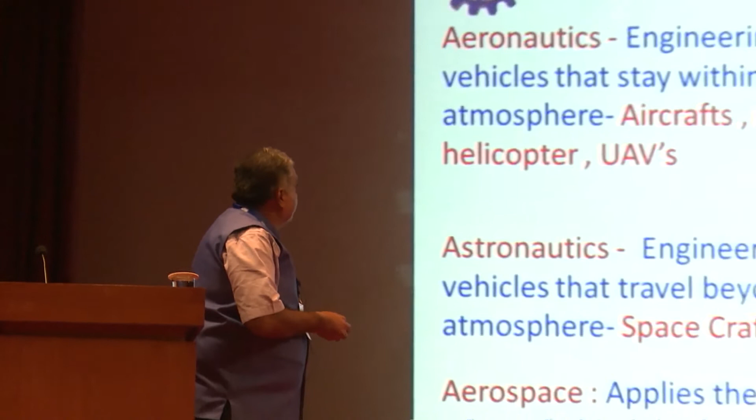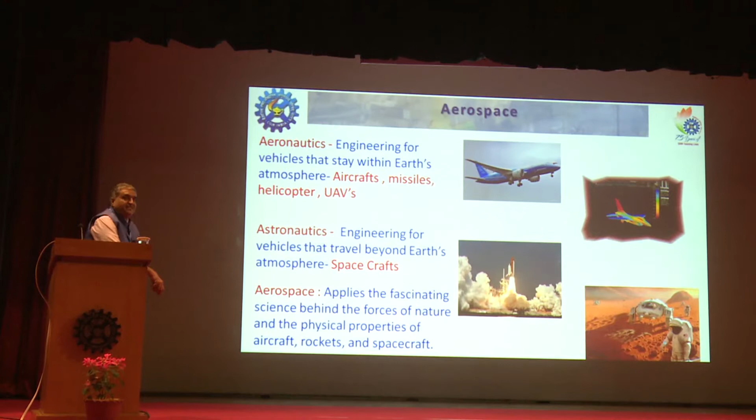As per me, the definition of aerospace is like a combination of aeronautics and astronautics. Aeronautics is what is flown below the Earth's atmosphere, and astronautics are the vehicles flown beyond the Earth's atmosphere. Aerospace is the fascinating science behind the forces of nature and physical properties of spacecraft, rockets, and such.

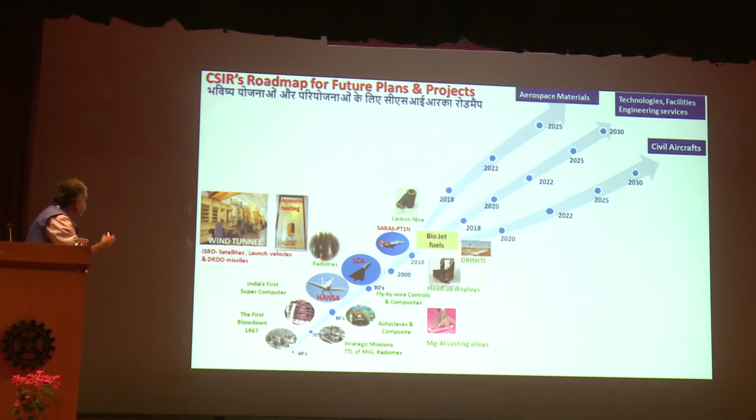CSIR started aerospace in the 60s, and a lot of technologies and facilities have developed. However the major thing happened in the 90s and before, where light combat aircraft technologies were developed by CSIR. Then we developed the SARAS aircraft, a 14-seater, and recently the Drishti and biojet fuels, along with two important facilities which are being used by DRDO and ISRO, developed till 2015.

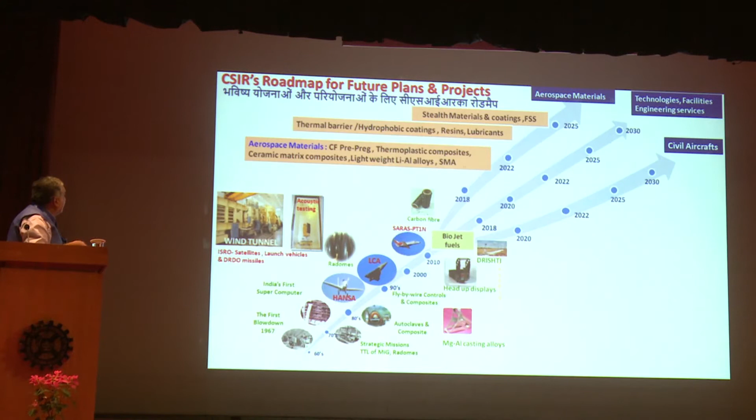Now we have three clear-cut roadmaps: aerospace materials, technologies, and civil aircrafts. In materials, we are planning to take up lightweight alloys, shape memory alloys, thermoplastic composites, coatings, resins, lubricants, and stealth materials. This will be the vision till 2025.

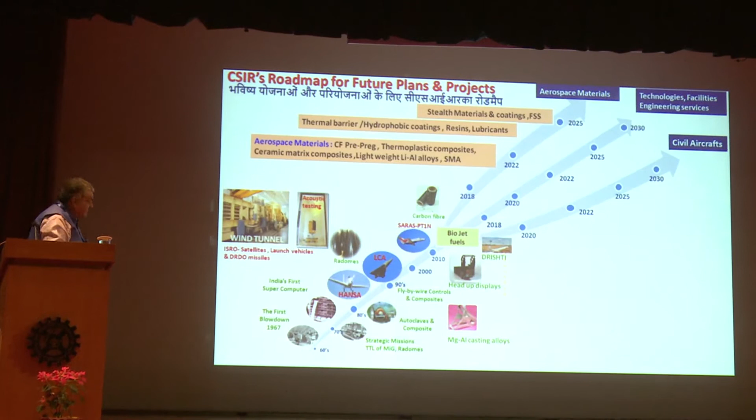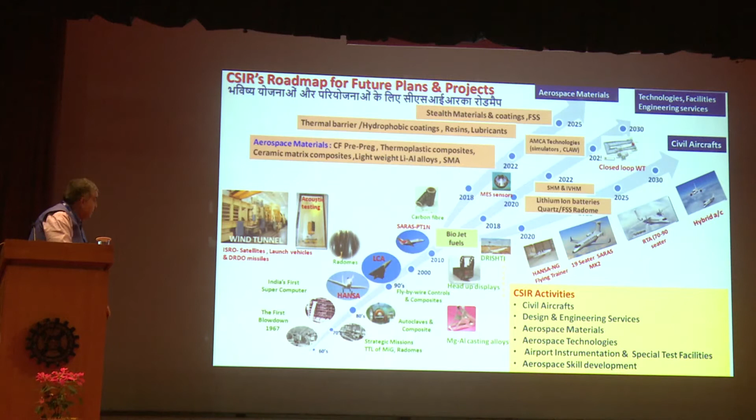In aircrafts, we will be taking up 2-seater, 19-seater, 70-seater, and electric propulsion aircraft till 2030. And in technologies, we will be taking up sensors, batteries, radomes, structural health monitoring, AMCA, and all these technologies. So this is the vision, and these are the activities we will be concentrating on, including skill development.

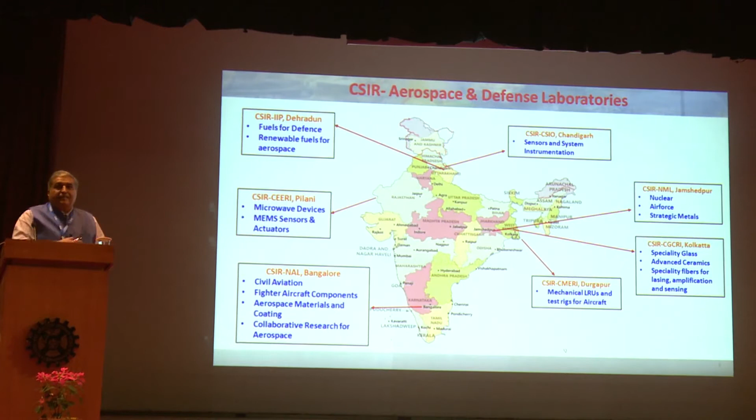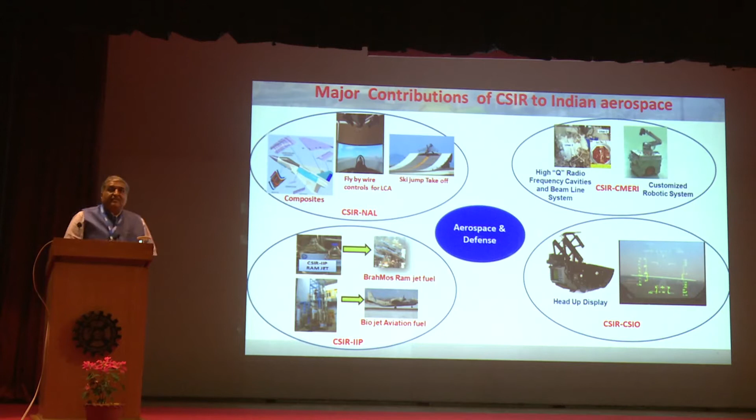These are the participating labs which CSIR has brought together on the theme of aerospace engineering, about 7 participating labs involved in this whole vision of the Director General of CSIR. So I will take you through the contributions CSIR has made.

For the Tejas LCA, complete composites, fly-by-wire, and ski jump technology were developed by NAL. For customized robotic systems and beamline systems, a lot of contribution has been done by CSIR-CMERI. CSIR-IIP has done BrahMos ramjet fuel and recently biojet aviation fuel.

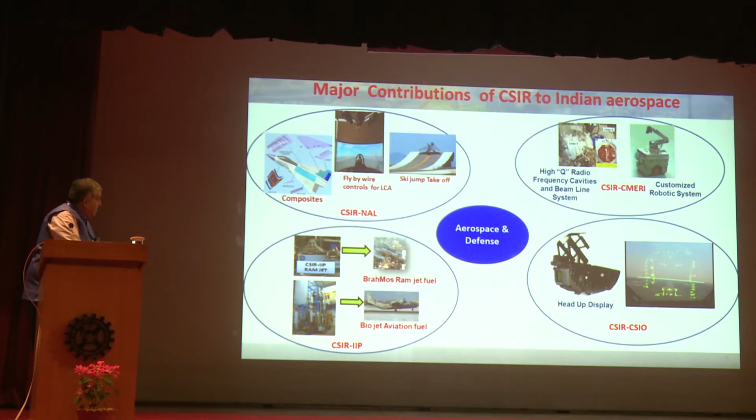CSIR has developed head-up displays and synthetic visions. Also CSIR has developed space traveling wave tubes, acoustic sensors, CGCRI glass beads, and a lot of aerospace materials like composites, magnesium, aluminum alloys, carbon fiber, shape memory alloys, and some Wankel engines and autoclaves developed over the last 2 decades.

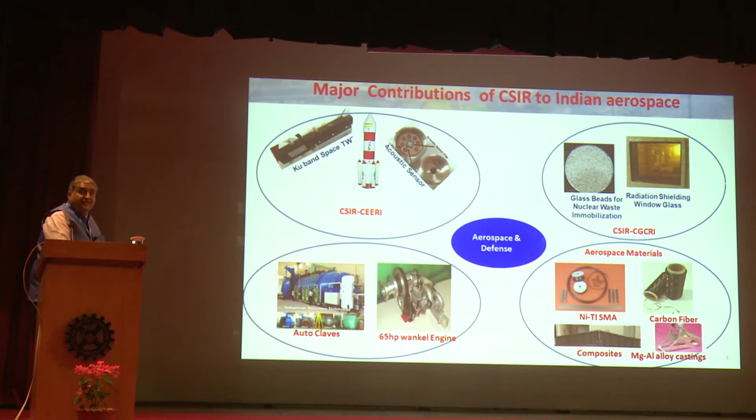The important facilities include wind tunnel facilities, one of the most prestigious, where all missiles, civil and fighter aircrafts, and ISRO projects get tested, which is one of the best, and the acoustic testing facility for satellites and GSLV.

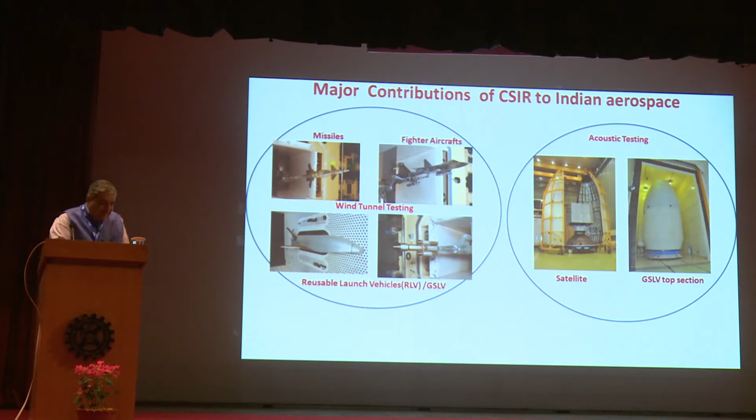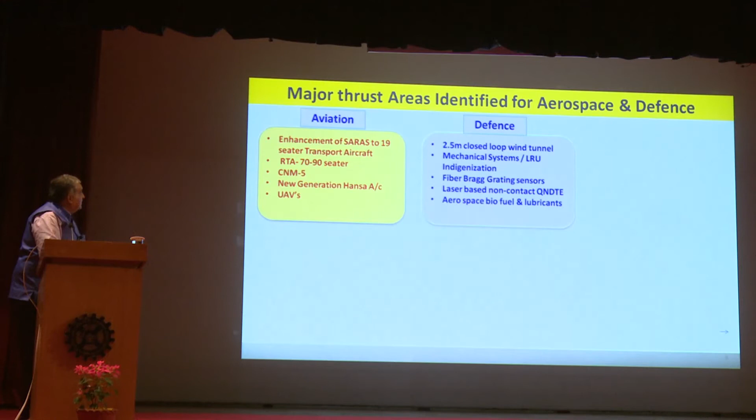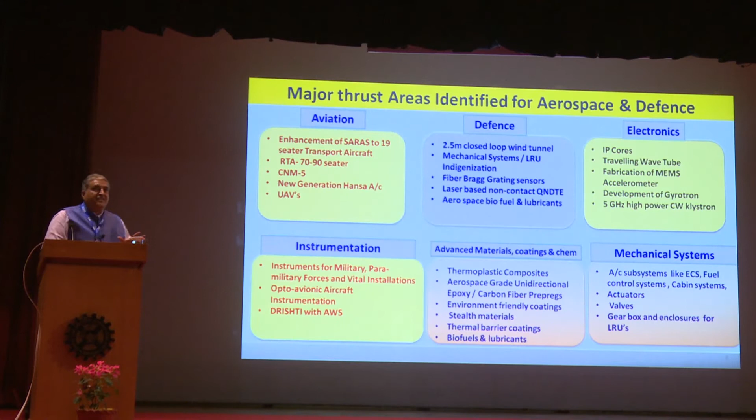A lot of contribution has been done over the last 2 to 3 decades, and the socio-economic impact is unmeasurable. The major thrust areas for aerospace are aviation, facilities, aerospace electronics, instrumentation, materials, coatings, and mechanical systems. This is what we would like to drive the CSIR vision towards aerospace.

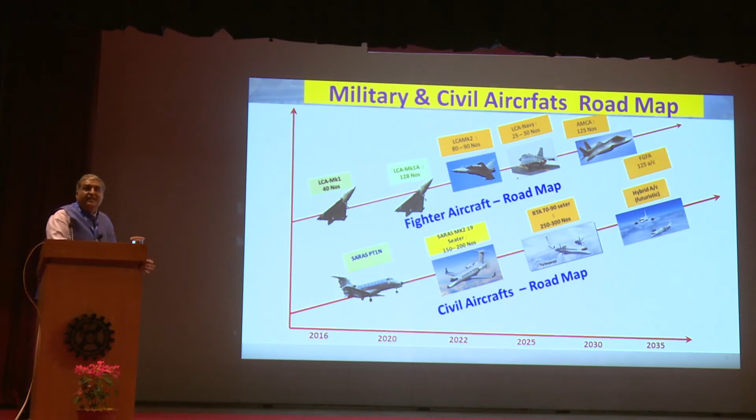This is the roadmap of civil aircrafts, where today we have the SARAS PT-1N, and by 2022 this PT-1N will be converted to Mark II, which is a 19-seater, and then by 2030 we will be developing a 70 to 90 seater, and then slowly move to the hybrid aircraft, which is electrical or electro.

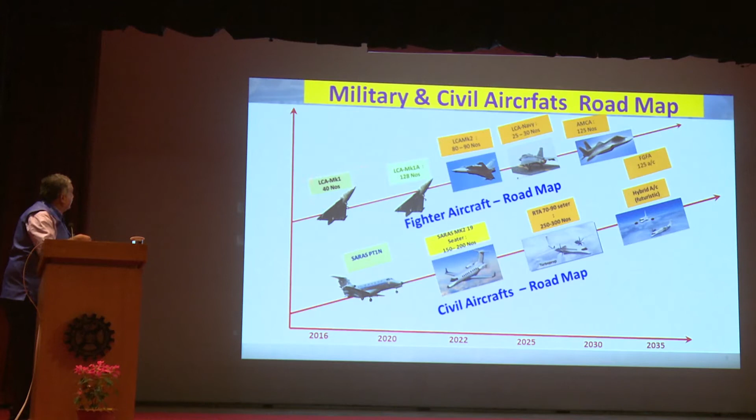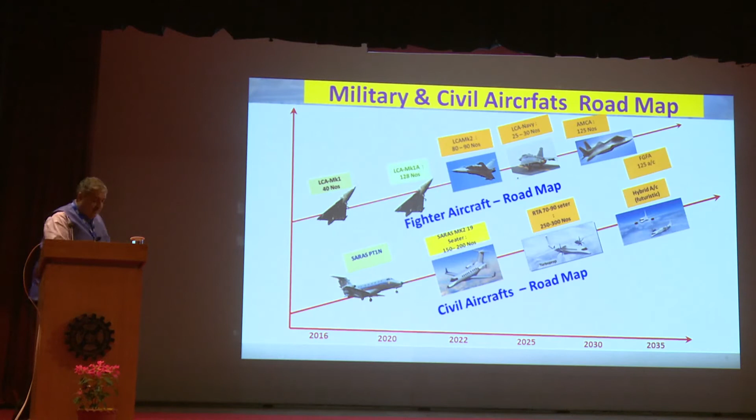Similarly, there is a clear-cut fighter aircraft roadmap. We have LCA Mark 1, Mark 1A, Mark 2, Navy variant, and then by 2035 there will be an advanced medium combat aircraft. This is the ministry's and the country's vision and roadmap, which has come from many documents.

I will just run through the fighter aircraft history. The fighter aircraft HF-24 was developed by HAL in 1967, and there was no development for almost 35 years in the country. This is where aerospace lagged much behind.

Then in 2001 the LCA, which is the 4th generation fighter, came with 3 variants, and now by 2025 it is becoming the advanced medium combat aircraft, with all stealth, sensor fusion, and all these things coming to it.

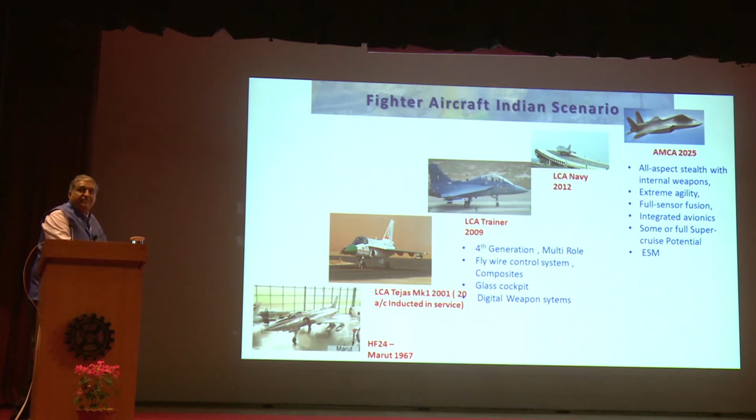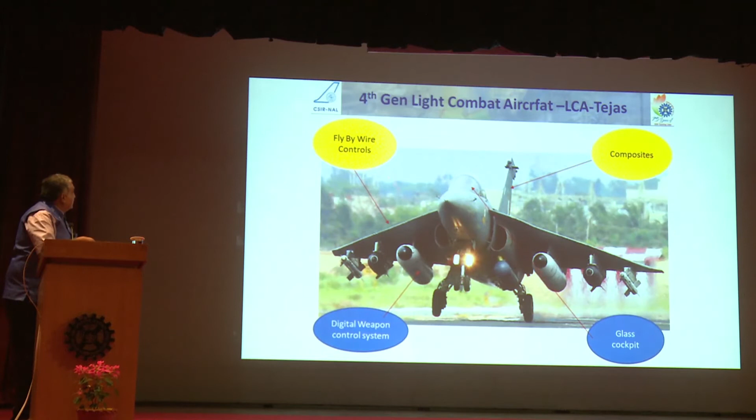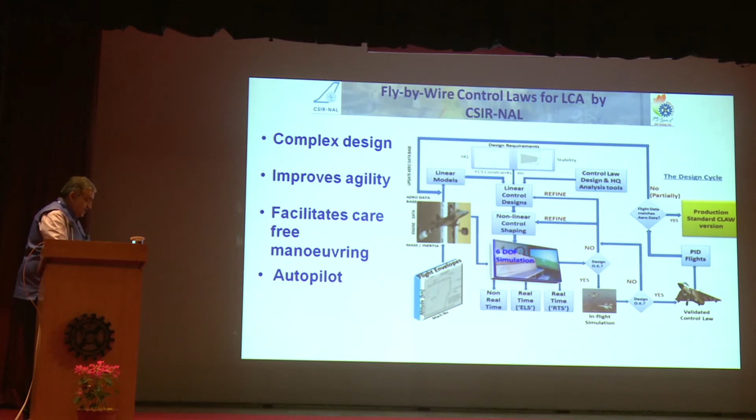These are the technologies developed by CSIR. LCA is called a 4th generation aircraft with features like fly-by-wire control, composites, and glass cockpit. Two of these 4th generation technologies were developed at CSIR: the complex fly-by-wire control system, which greatly improves agility, maneuvering, and autopilot. We will show a video of it.

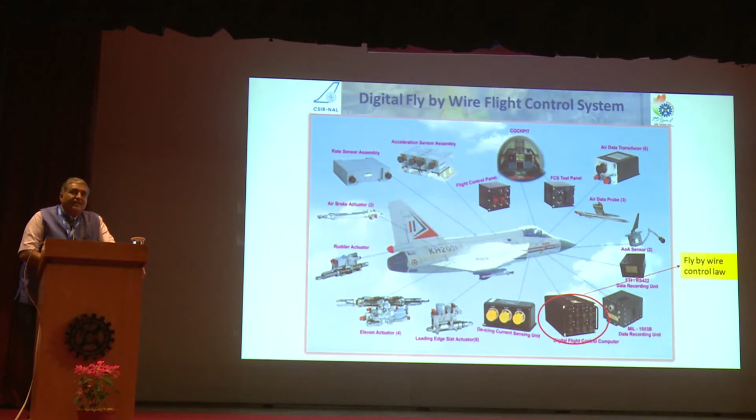This is the complex flight control architecture, where in the computer the fly-by-wire controller, developed at CSIR, resides. There was a technology challenge for this particular controller development, and it was jointly taken up by CSIR and DRDO to make it happen after 1998.

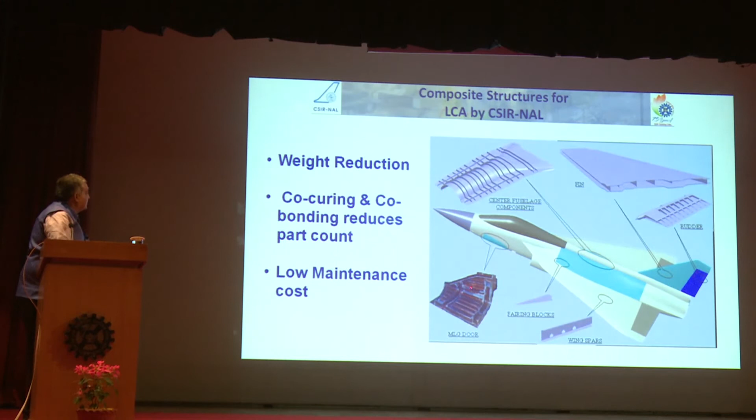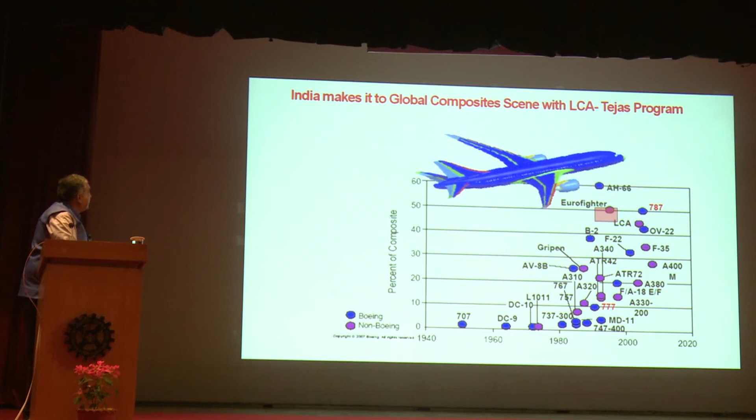There are composites developed for LCA, very complex composites used for weight reduction. If you see the total gamut of composites used in civil and fighter aircraft, LCA stands at the top, with almost 50% of the aircraft made of composites. This has come from CSIR.

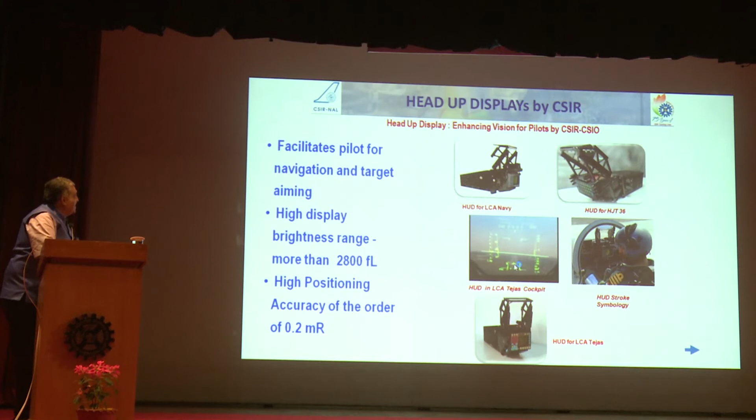The head-up display, which was a very tough technology at that time, has also been developed by CSIR. With permission, sir, I will run one 20-second video so that people will get an appreciation of what this control is.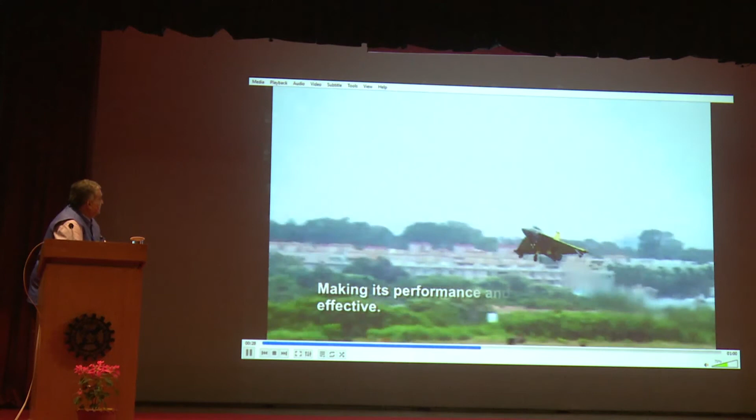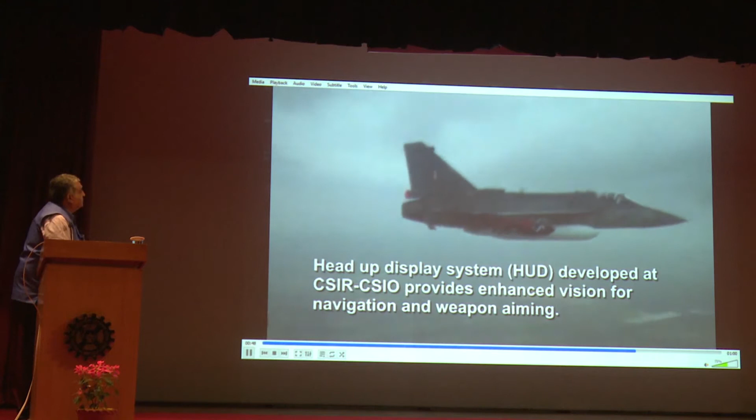CSIR flying high with Tejas, the first indigenous light combat aircraft, recently inducted into the Indian Air Force. Tejas, the world's smallest lightweight fighter aircraft, thanks to the use of CSIR-developed advanced composites that constitute 45% by weight and 90% by area. CSIR-NAL and CSIR-CSIO developed vital technologies and subsystems for Tejas, making its performance and operation cost-effective. CSIR's world-class flight control systems provide improved agility and maneuverability. CSIR's wind tunnel facility helped in finalizing the aerodynamic design and configuration of Tejas. The head-up display system, HUD, developed at CSIR-CSIO, provides enhanced vision for navigation and weapon aiming. A big boost for the Make in India mission of the Government of India. CSIR, the pride of Indian science.

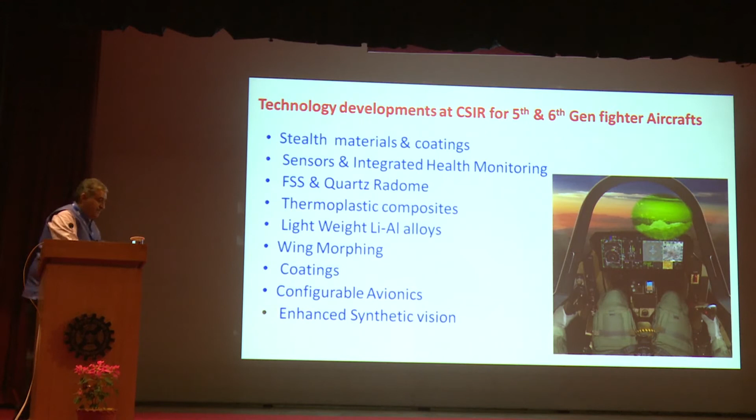For the next 5th and 6th generation of fighter aircraft, CSIR is working on stealth materials, sensors and integrated health monitoring like structural health monitoring or any other avionics sensor, quartz radome and FSS radome, composites, lightweight lithium aluminum alloy, wing morphing, coatings, configurable avionics. This is new technology coming in next generation fighter aircraft, where avionics need not be duplicated across the aircraft. It can be configured at one place, and based on the course of the aircraft, more hardware and software resources can be taken, and other resources can be managed. This is called enhanced synthetic vision.

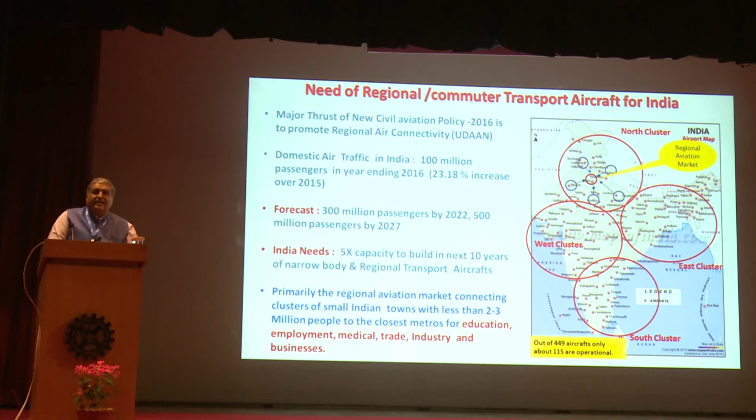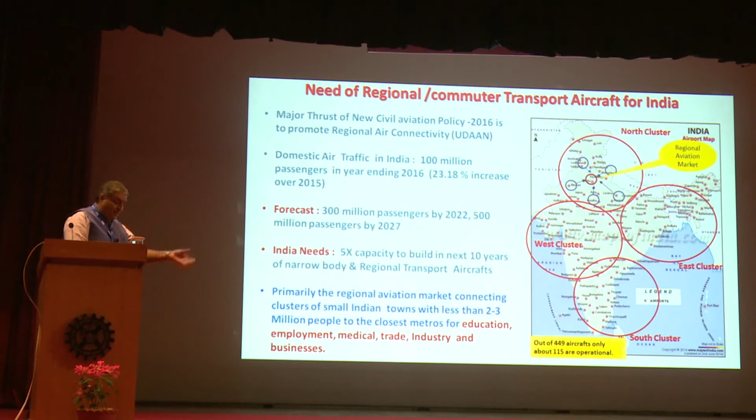Coming to civil aircraft, if you see the country's geographical layout, we have 4 clusters with very close cities. Like Delhi-Lucknow, Delhi-Amritsar, and all, within 300 to 500 kilometers. There is no aircraft which can make effective connectivity for employment, medical, trade, rural development and all. So this was studied, and thanks to the UDAAN scheme where government has promoted about 128 routes for regional connectivity.

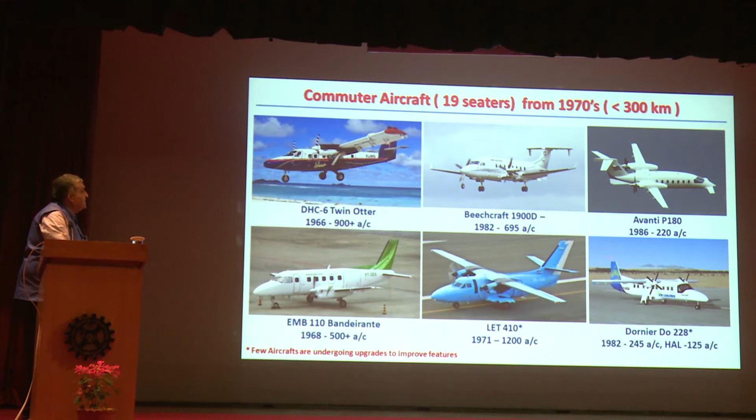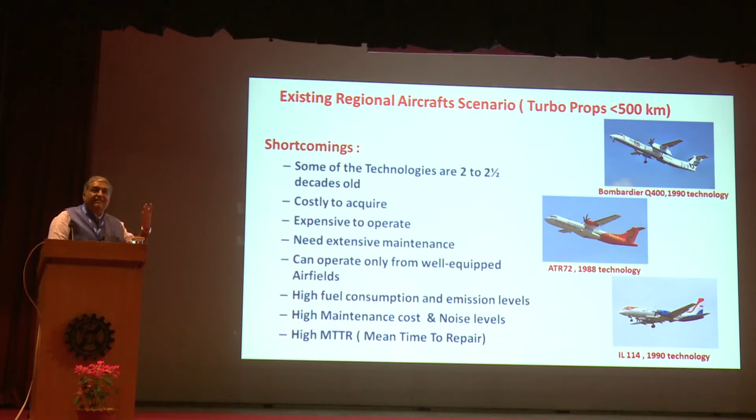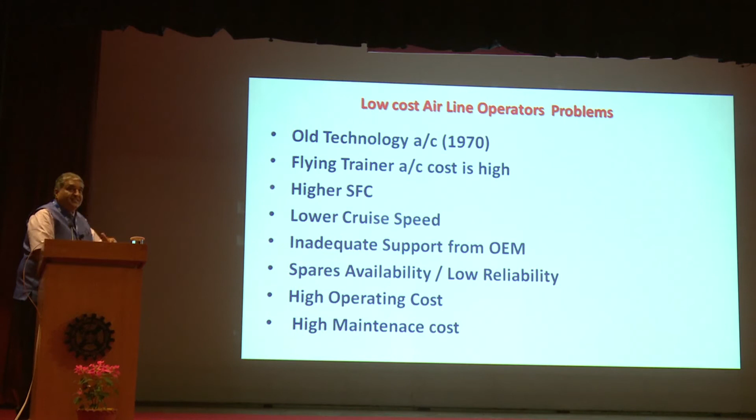Today we have commuter aircraft of 1970s or 1980s technology, and turboprop aircraft like ATR, Bombardier and IL, also about 1990s technology. CSIR has studied the airline operators' requirements. They have very old aircraft, very costly flying trainer aircraft, higher specific fuel consumption, low cruise speed, and spare parts availability is an enormously costly affair. That's why air connectivity is not improving in the country. Though we have 449 airports, we are operating just 115.

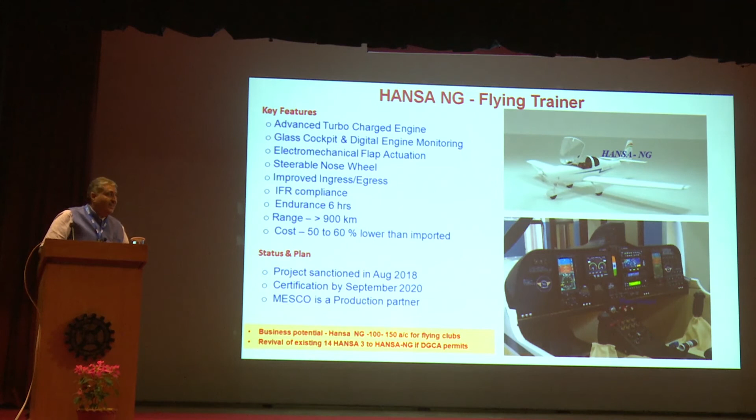So we studied the flying training requirement, and we will be positioning Hansa NG, which has a full glass cockpit, at 50 to 60% lower cost for flying training. This will be given to all flying clubs to train pilots, because passenger traffic is increasing almost threefold and pilot training aircraft are very costly. This is the first aircraft which will come out of production in 2020, and MESCO is the partner for this.

Second is SARAS, a 19-seater aircraft for less than 300 kilometer distance. This is also a sanctioned project. It will have 19 seats and a lot of technologies not found in recent aircraft. I can show the comparison here. This will be certified by 2024 and production from 2025.

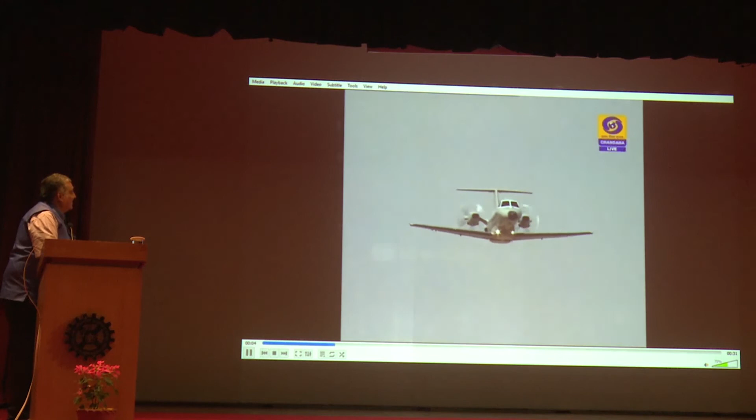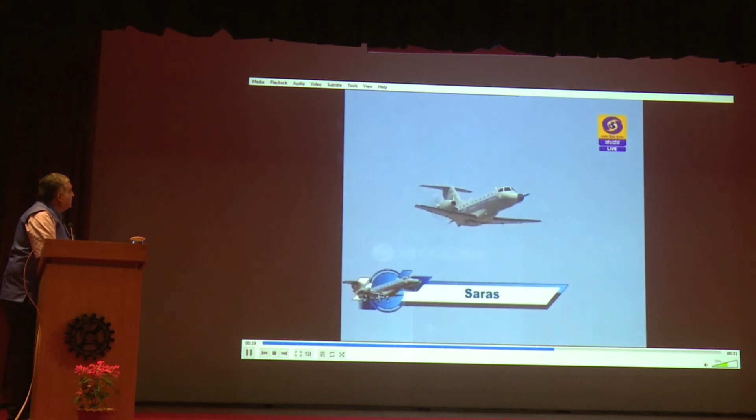After the scintillating takeoff by the SARAS, now you can see the first indigenous multi-role light transport aircraft SARAS, designed by National Aerospace Laboratories. The modified prototype of SARAS PT-1, designated PT-1N, flying in front of you, is piloted by Wing Commander Uday Pratap Singh and Wing Commander Prabhakar.

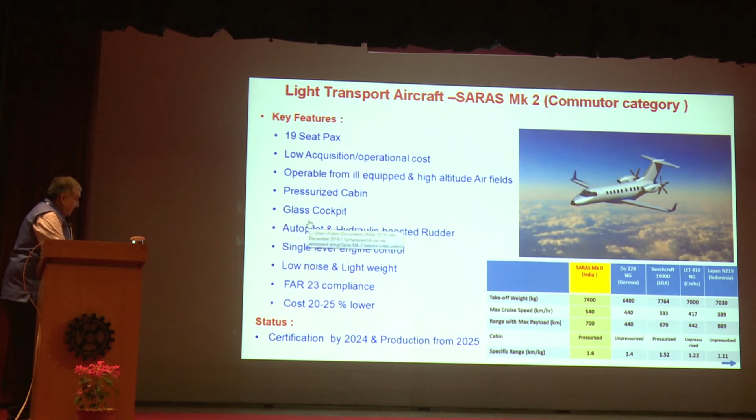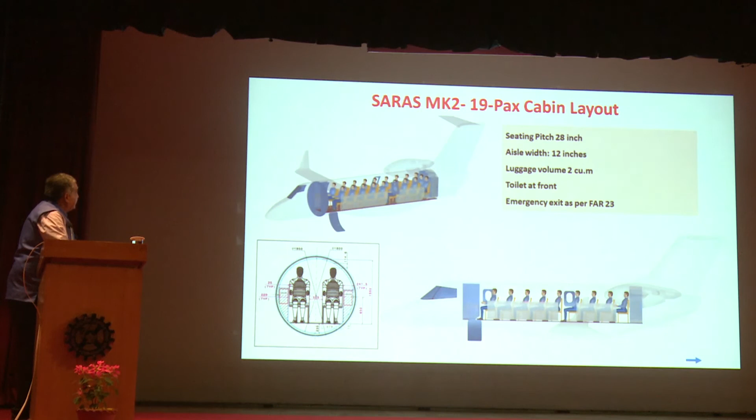We will be putting a lot of composites and procured technologies in this, and propulsion is also high. This will have a layout with 19 seats and a toilet and all these things, compliant to FAR 23. So training requirement has been taken care of, and commuter connectivity requirement has been taken care of.

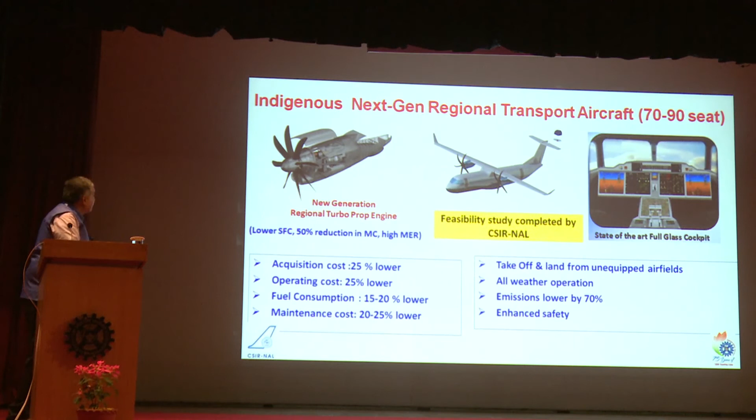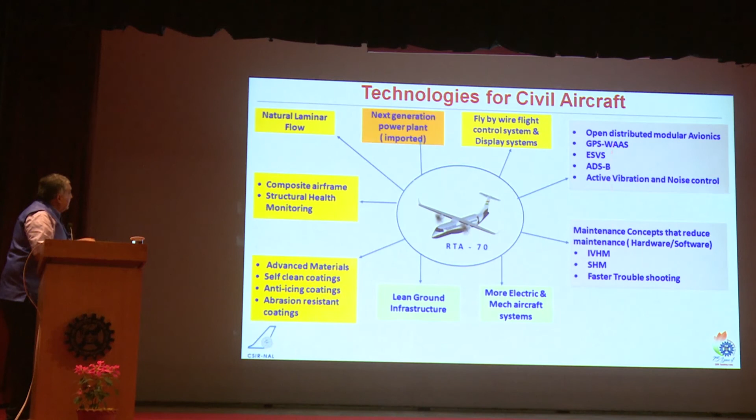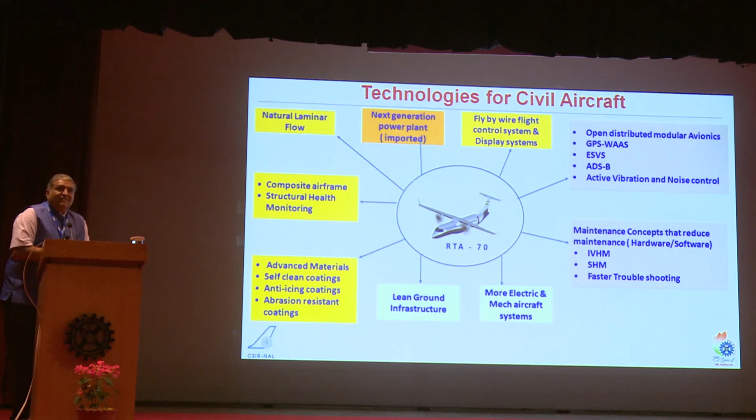Now we are working on a 300 to 500 kilometer, 70 to 90 seater aircraft. This proposal has been given to government. It will have a new generation turboprop engine and state-of-the-art glass cockpit, and reduction in acquisition and operation cost. Important technologies include laminar flow wing, fly-by-wire flight control, avionics with cheaper maintenance, more electric systems, and all these technologies. If everything goes well - yesterday our DGCSIR made a statement in the press - within 6 to 7 years we will make this aircraft certified.

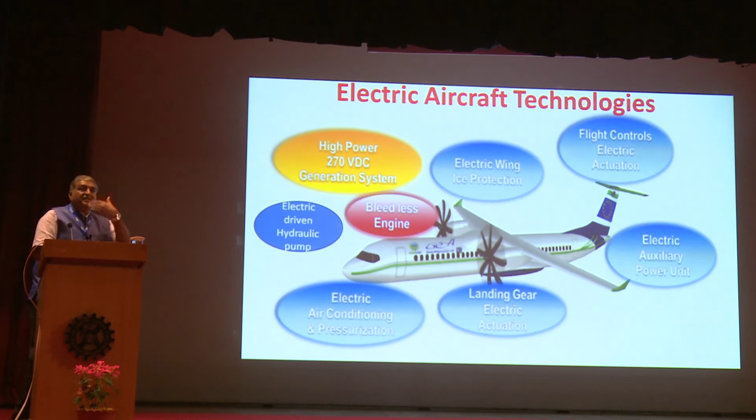We should not forget about electric propulsion. These are the technologies for electric propulsion, which is the future of civil aerospace. There are a lot of advantages like lower emissions, lower noise, improved efficiency, and there are about 4 such things: all electric, turbo electric, parallel hybrid and series hybrid. I did not have to go through it because these technologies are well understood.

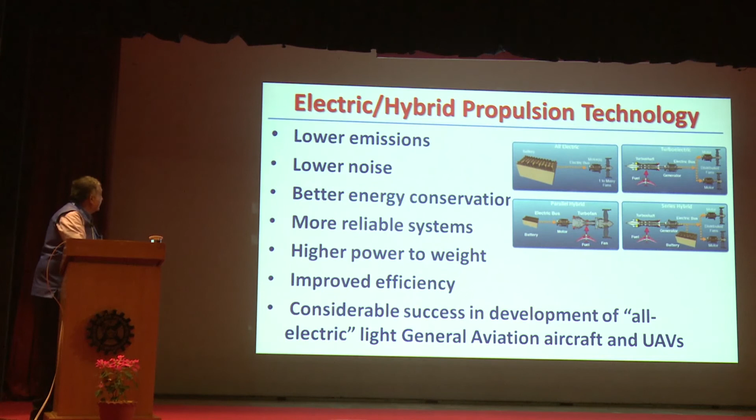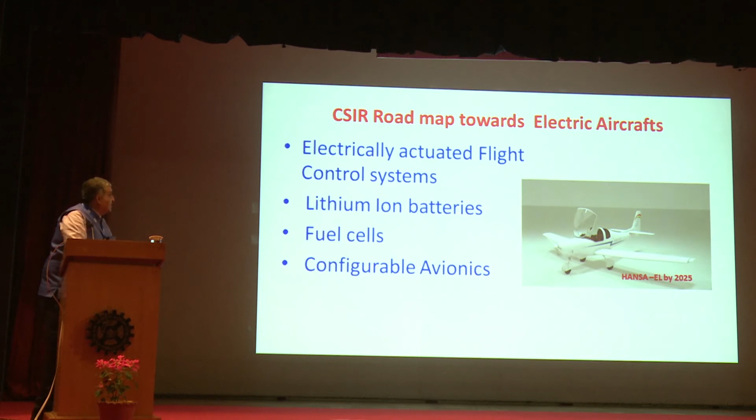CSIR has started work on flight control actuators, lithium-ion batteries, fuel cells and configurable avionics. We will be putting our Hansa as an electric vehicle by 2025. That is our vision, and we have a lot of aerospace test facilities which need to be upgraded.

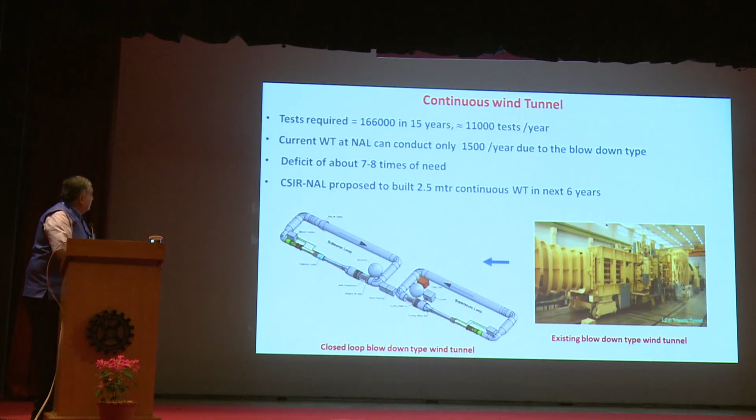Today the wind tunnel gives about 1,500 blowdowns per year, which is not sufficient because the requirement is about 11,000 blowdowns. So we will shortly move to a closed loop type of wind tunnel. Today pressure gets accumulated and the blowdown happens, but in the closed loop system there is no accumulation of pressure - the compressor itself sucks the air.

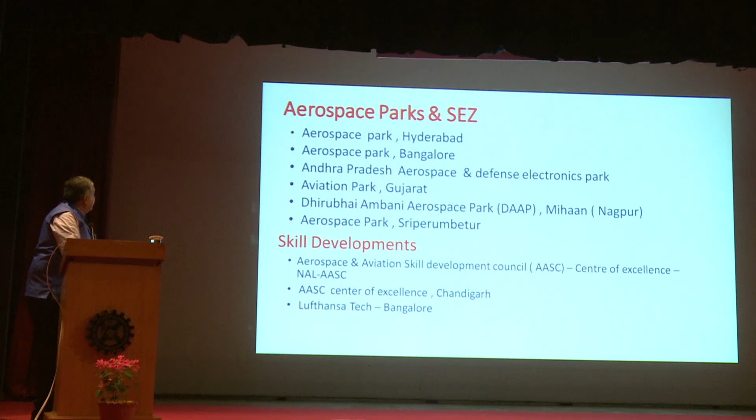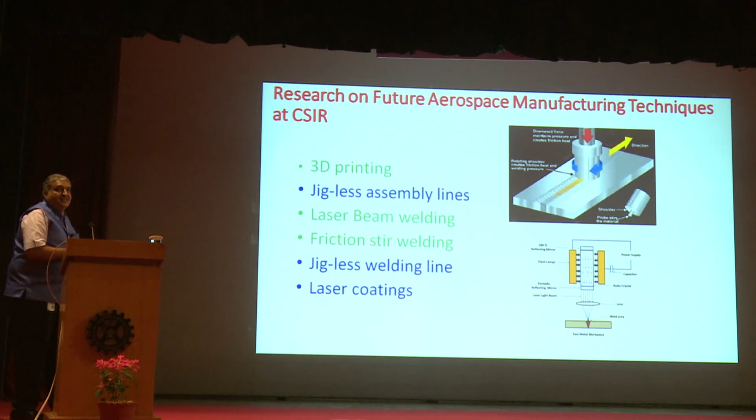Manufacturing is also very important. There are a lot of aircraft manufacturing industries, and CSIR is now working on 3D printing, jig-less assembly lines, laser beam welding, friction stir welding, jig-less welding lines, and laser coating, which is the future of aerospace manufacturing for reduction of weight and also for reliability. Thank you very much.